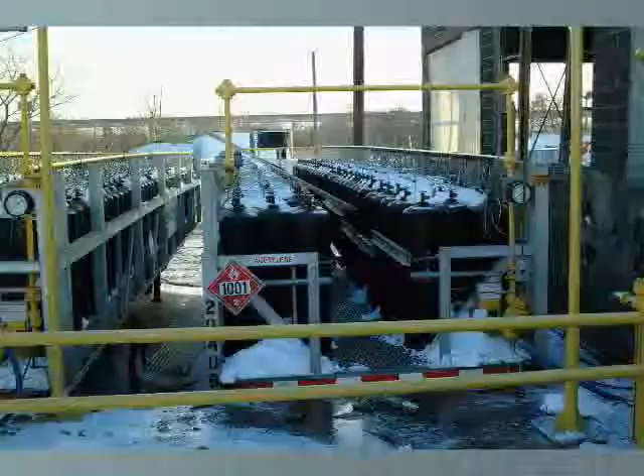The U.S. Chemical Safety Board issued a safety bulletin in January of 2006, warning acetylene producers of the dangers of allowing the violently explosive gas to accumulate in enclosed spaces.

The bulletin cautions acetylene producers to maintain up-to-date procedures and checklists, train their personnel, and ensure that acetylene can only vent to safe locations. The CSB Safety Bulletin followed an investigation into the January 25, 2005 explosion at Acetylene Services Company, or ASCO, that killed 3 workers and gravely injured a 4th.

The incident occurred at the company's plant in Perth Amboy, New Jersey. The accident at ASCO was a terrible tragedy. The force of the powerful explosion caused loss of life as well as extensive property damage. By understanding what happened, we hope we can prevent another such tragedy from occurring in the future.

Several things went wrong that caused this accident. Our investigation found that the facility design allowed acetylene to be vented into an unsafe location, a wooden shed. On the day of the accident, an incorrect sequence of operations and the failure of a critical check valve led to an acetylene explosion. The CSB has prepared a computer animation to help visualize what happened at the acetylene plant.

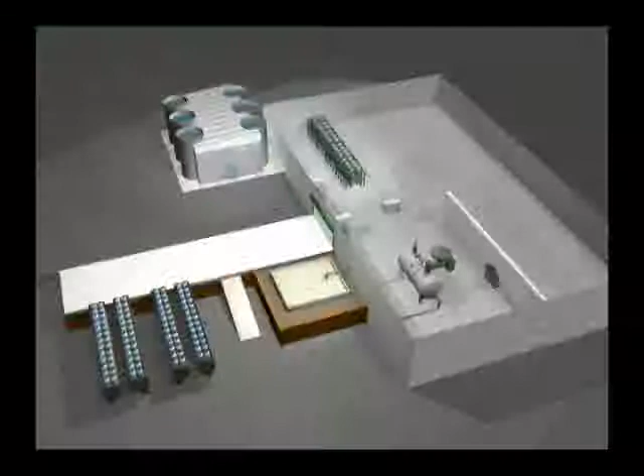Acetylene was produced at the ASCO plant through the chemical reaction of calcium carbide with water in a vessel known as an acetylene generator. The gas then flowed through pipes to cylinders for distribution to customers.

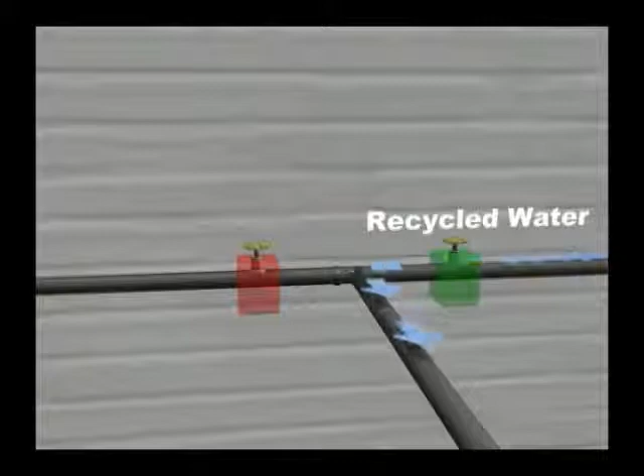Water was fed to the acetylene generator from either the city supply or from outdoor tanks containing recycled water. There was normally enough water pressure to prevent any acetylene gas from flowing backward through the water pipes, where it might find an opening, creating a danger of explosion.

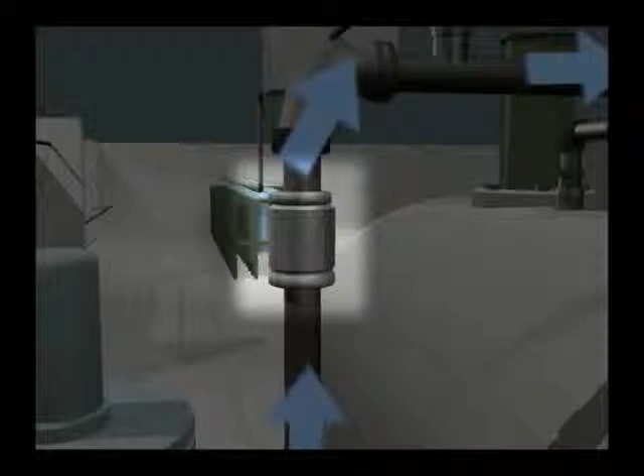The water line was also equipped with a check valve, a safety device intended to prevent the reverse flow of acetylene through the pipes. In normal operation, water flowed through the check valve into the generator. Should the water pressure fall, a plug in the check valve was supposed to block the flow of acetylene.

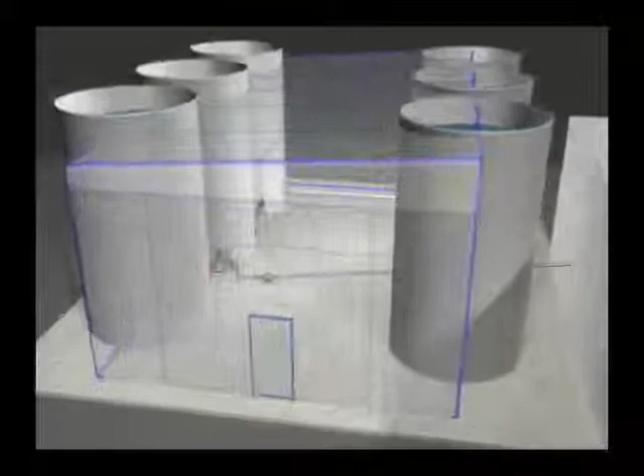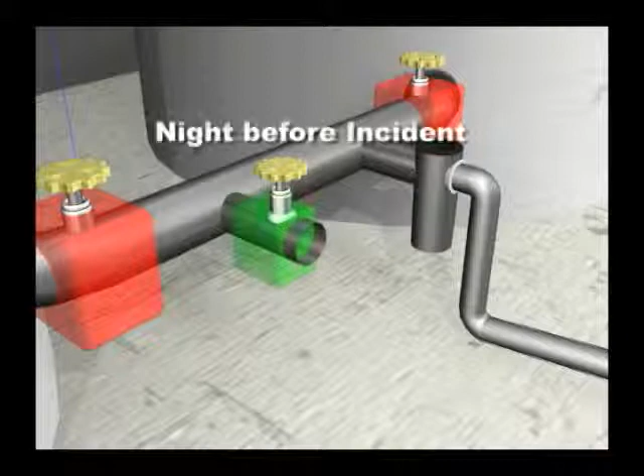The recycled water was supplied from several large outdoor tanks. The tanks were connected by wooden panels, forming a shed. A drain valve on the recycled water line discharged onto the ground inside the shed. On the night before the incident, this valve was left open to protect the water line from freezing.

The next morning, the acetylene generator was started up using the city water supply. The CSB believes that operators later shut off the city supply, opened the valve to the recycled water line, but then, for some reason, delayed switching on the flow of recycled water.

Without water pressure, acetylene began to flow backward from the generator. The check valve was the only remaining safeguard to prevent acetylene from reaching the open drain in the shed. But on the day of the accident, the check valve didn't work.

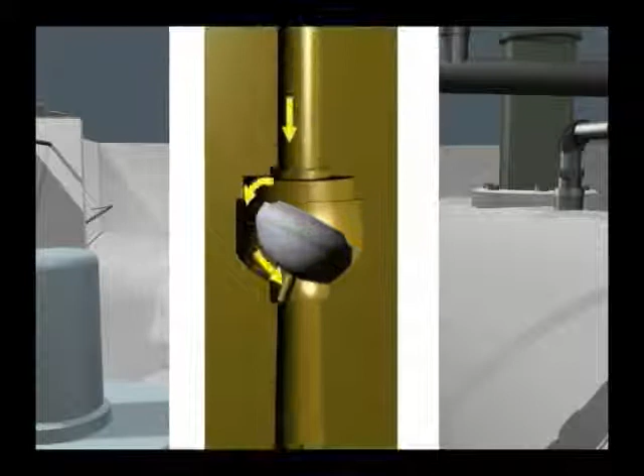The CSB later found that the design of the valve allowed the plug to become misaligned, allowing acetylene to flow back into the water pipe. The gas flowed back through the check valve, through the recycled water line, and out of the open drain valve into the shed.

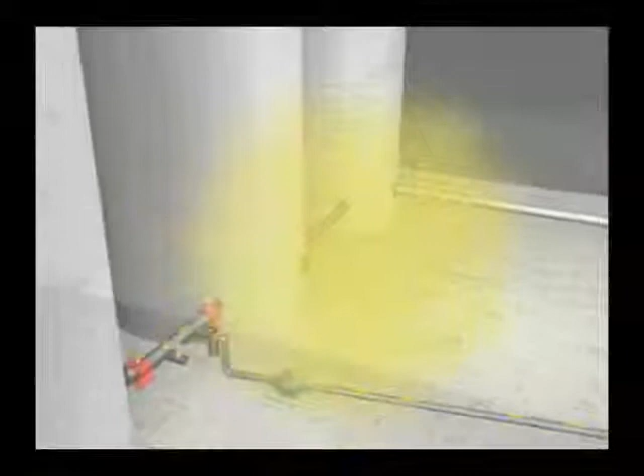The concentration of acetylene built up to a dangerous level. The CSB believes the acetylene gas most likely ignited when it contacted the hot surface of a propane space heater at the far end of the shed.

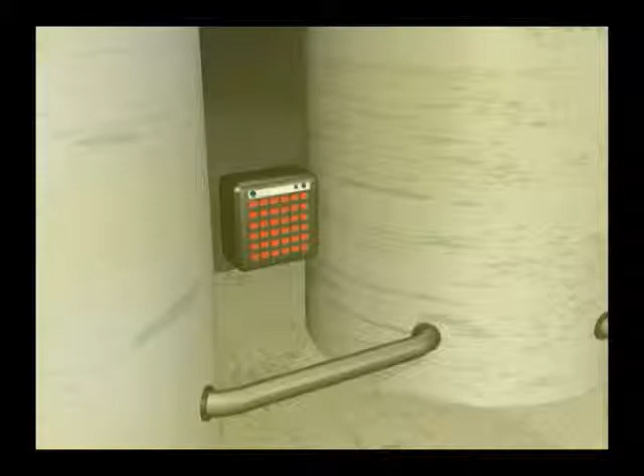The result was a violent explosion at 10:36 a.m., which pulverized the shed. The deadly blast wave struck the victims who were shoveling snow nearby.

As you have seen, had up-to-date operating procedures been in place and followed, had the acetylene check valve been less susceptible to a critical failure mode, and had the facility been equipped with appropriate heating and electrical equipment, this accident would not have occurred. The CSB Safety Bulletin outlines a number of good safety practices for managing highly flammable gases, like acetylene.

Investigations Manager Steve Selk: When handling or manufacturing hazardous materials like acetylene, a high level of discipline should be applied.

Keep operating procedures up to date. Provide operators with checklists to help them run the process consistently. Ensure that vessels and pipes that contain flammable materials are only vented to safe locations. Check for potential sources of ignition in areas where flammable materials might be released.

Another thing that CSB recommends is that facilities broadly interpret codes that may be applicable to their operations. The National Fire Codes explain how low-temperature heating, like steam, shall be used for locations that may contain acetylene.

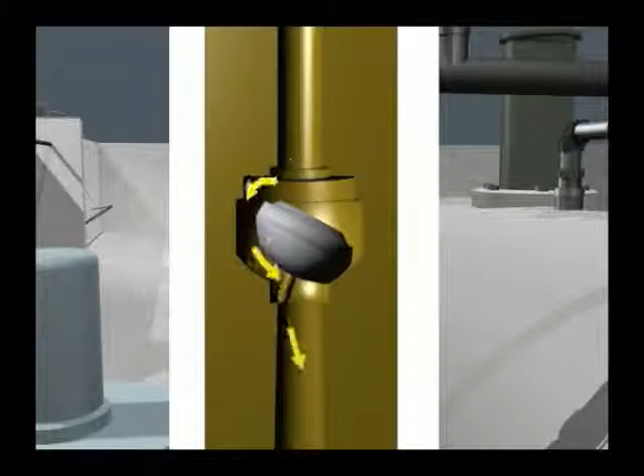Finally, CSB cautions facilities about relying on check valves. Check valves can fail. Select a check valve that's appropriate to your application.

In addition to those safe handling measures, the CSB issued 3 specific recommendations addressed to the companies involved and to OSHA. Board Member Gary Visscher:

The board recommended that ASCO implement an effective process safety management program, including written operating procedures and checklists, and ensure that its workers are trained and are following the procedures.

The board recommended that Rexarc Incorporated, the maker of the check valve, inform users about the incident and replace valves with others that will operate reliably.

And finally, the board also recommended that the Occupational Safety and Health Administration, OSHA, update its acetylene standard, which now contains certain obsolete provisions. In summary, we at the Chemical Safety Board believe that following these recommendations and the other

measures discussed in this safety bulletin will prevent similar accidents from occurring in the future. The CSB Safety Bulletin on Flammable Gas Accumulation Dangers is available online at csb.gov.